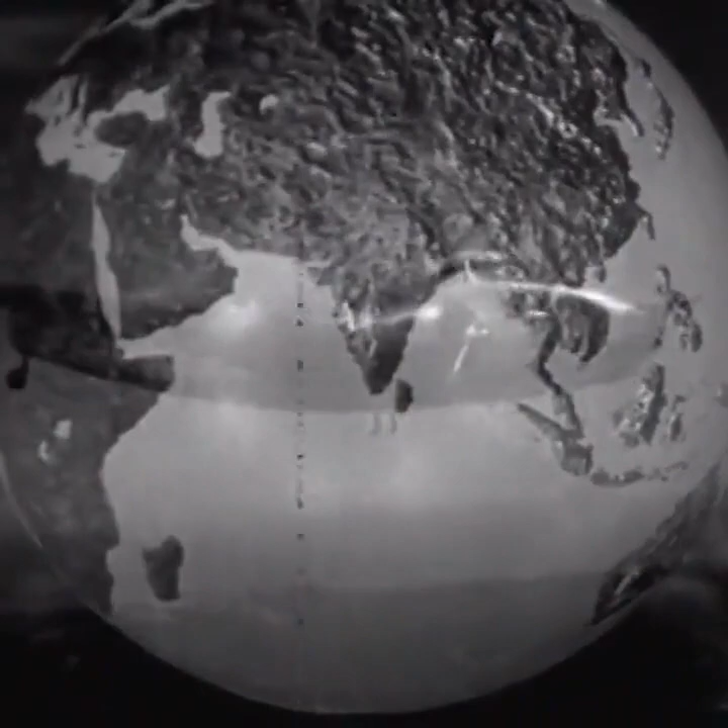And in all corners of the globe, 24 hours of every day, these ships fly the airways in routine flight, confidently accomplishing the jobs for which they were built. The conquerors of time and space.

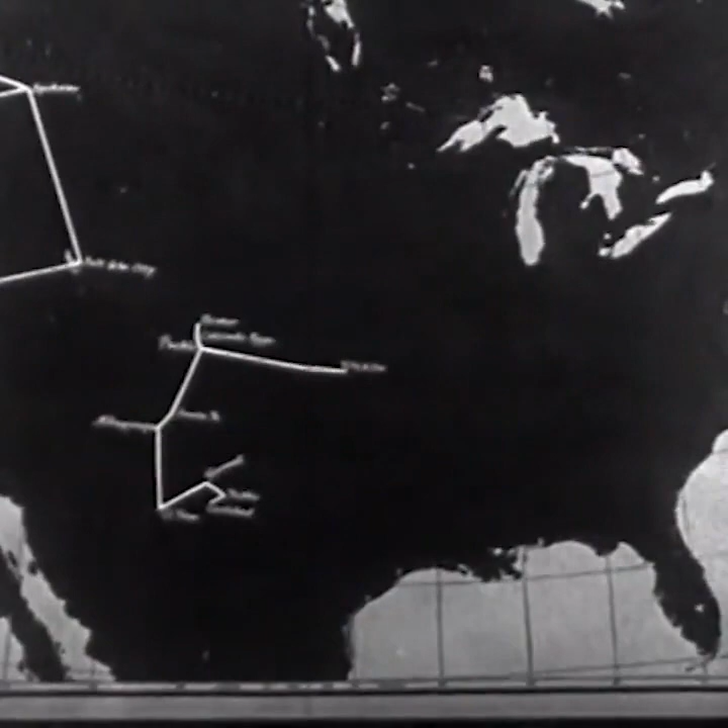Lockheed over North America. United Airlines, Continental Airlines Incorporated, Mid-Continent Airlines Incorporated, Northwest Airlines, Chicago and Southern Airlines, Braniff Airways Incorporated, National Airlines, Delta Airlines, Boston Maine Airways Incorporated, Trans-Canada Airlines, Pacific Alaska Airways.

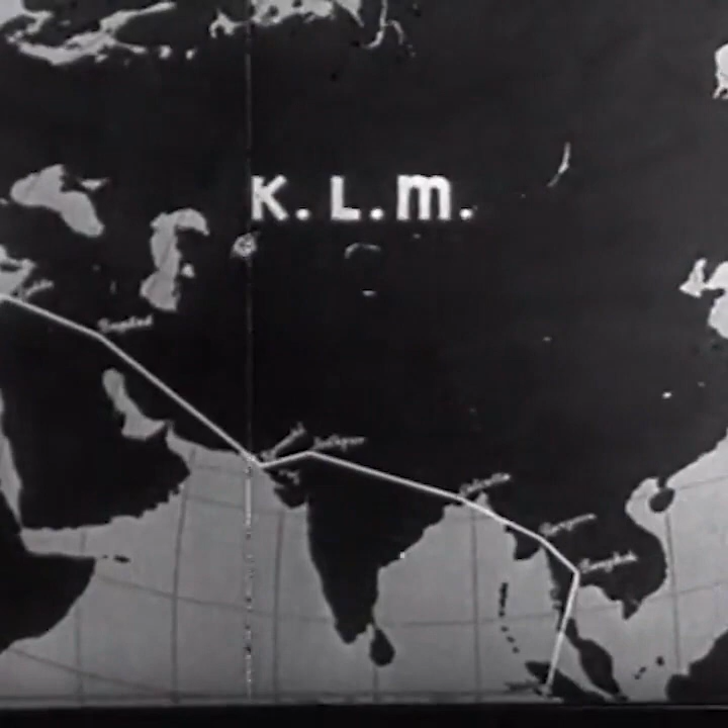KLM, LOT, Aeroput, LARES Romania, Air France. Lockheed over Asia: KLM, KNILM, Japan Air Transport Company Limited. Lockheed over the Antipodes: KNILM, MacRobertson Miller Aviation Company, Guinea Airways, Ansett Airways Limited, WR Carpenter Airlines, Union Airways of New Zealand.

Lockheeds also serve high government officials of the Netherlands East Indies, Mexico, Venezuela, Brazil, Argentina, Australia, Canada, Great Britain, India, and the United States.

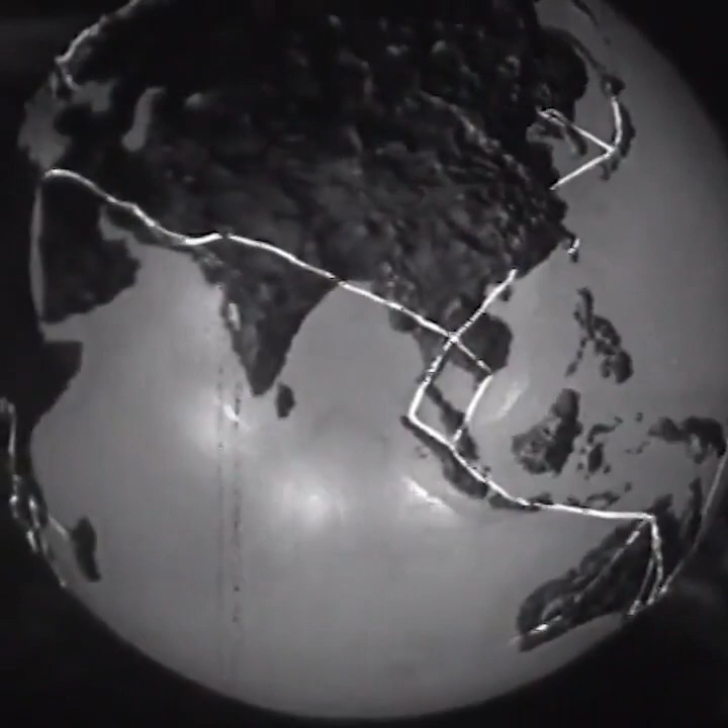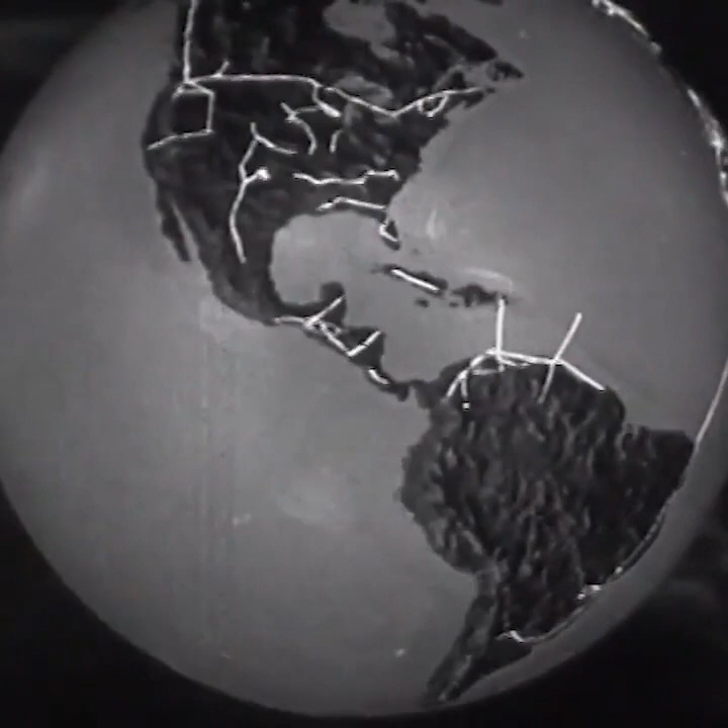Worldwide coverage, but it has not been accomplished in a day. It is the result of a smooth-running combination of men and machines. In that combination lies the story of Lockheed itself. It is a success story, modern, exciting, typically American.

The Lockheed Aircraft Corporation plant, Burbank, California, in 1926. And today, the same company, the same location, but quite definitely not the same plant.

As recently as 1932, sales aggregated the overwhelming total of $23,298.03. In 1940, actual deliveries amounted to more than $42 million, and conservative estimates indicate that in 1941, this figure will be more than doubled.

And to the men of Lockheed belongs a large share of the credit, to their skill and to their loyalty. They are a cross-section of typical American workmen: drillers, riveters, tool makers, die casters, machinists, and technicians. In 1931, there were only 300 of them.

In 1941, over 35,000. Every man who checks in, from office boy on up, has taken and passed exhaustive tests covering intelligence, temperament, and special aptitude to prove his individual ability. 35,000 American workmen, the right men for the right jobs to build the best planes.

This is not a trick shot made with mirrors. It is the drafting room of the engineering department where every new Lockheed has its beginning, conceived with the purpose of supplying the answer to definite needs of the aviation industry. To attain this goal, over 850 engineers make over 5,000 drawing plans, devoting a total of over 200,000 work hours to their mission of creating one new design.

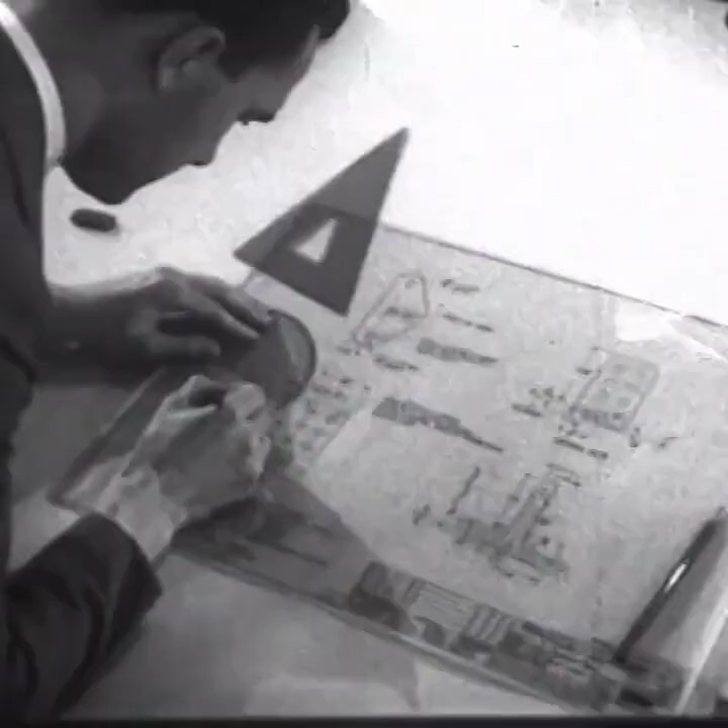The component parts of a modern airplane's wing, fuselage, and tail surface are almost countless in number, yet every single one of them must be engineered. Even the most minute part receives the greatest attention. Four separate drawings are made showing detail from four different angles. Although the part is no larger than a silver dollar, it will have to go a great deal further.

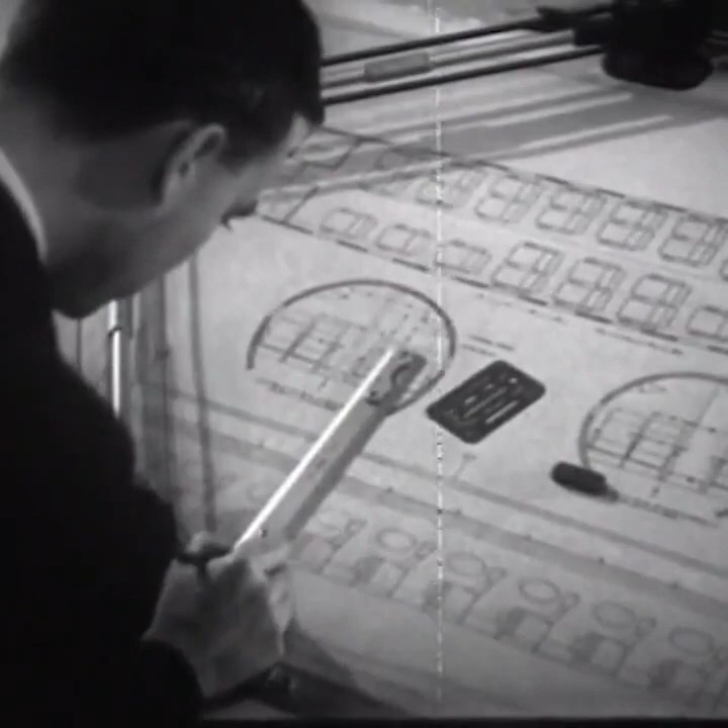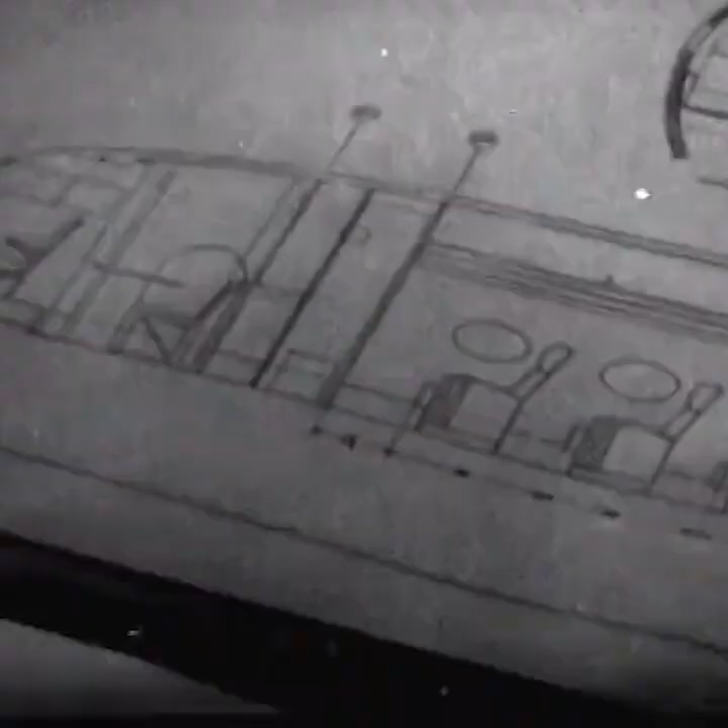The interior of a plane is one feature of design seldom associated in one's mind as coming under the supervision of the engineer. Yet one of his most important jobs is to provide utter comfort for passengers traveling through the air at high speeds. The Lodestar's cabin has been designed for this comfort.

Inside, the sound of powerful motors is reduced to a pleasant hum by scientific soundproofing and vibration control. Restful chairs, ample space, and headroom are results of thoughtful planning, and all Lockheeds are especially adaptable to the requirements of private owners. For businessmen to whom time means money, the Lodestar is convertible into a convenient and dependable office in the sky. The compact 12 becomes a comfortable lounge for attending important events anywhere at any time.

The cabin of Lockheed's new four-motor transport, the Excalibur, will look very much like this. Although the plane is still under construction, the engineers have built an exact replica, known as a mock-up, out of wood. In this way, every possible detail of passenger comfort can be effectively predetermined and applied.

But the ideas and plans that this man and the hundreds like him put into execution are not only those of Lockheed's chief engineers, but those of the entire flying world. For the Market Research Division maintains close contact with the operative branch of the industry. The staff compiles lists of important features relating to a plane's design. These findings are set up in the form of questionnaires.

If you were to build your own ship, on the flight station, where would you locate emergency controls? On the engine control stand, where would you put the levers and the rudder pedals? These comprehensive questionnaires are sent to airline executives, pilots, transport officials in every corner of the world.

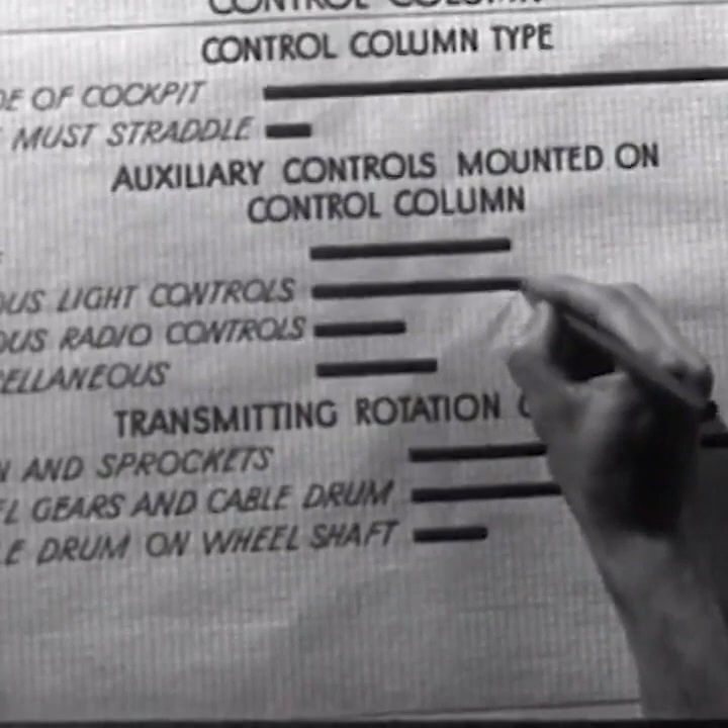Detailed graphs and charts are compiled by competent statisticians. No suggestion is too small. Every answer to every question is checked and noted. These findings are recorded in another pamphlet.

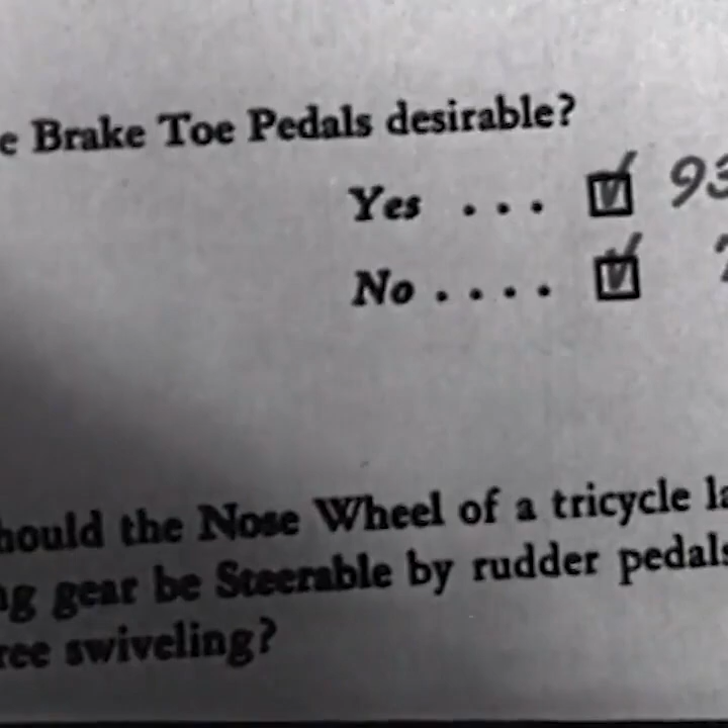You told us this is the way you would do it. On flight station, on engine control stand, and on rudder pedals, we asked, are brake toe pedals desirable? 93% said yes, 7% no. That verdict is submitted by men whose combined opinions represent the experience of over 16 million hours of flying.

These practical viewpoints, as gathered by market research, are submitted to the engineers. They combine these ideas together with their own creative ability in the conception and building of every new Lockheed plane. That's how Lockheed designs airplanes to suit the men who know airplanes best: operators, pilots, and regular airline passengers. And the first form a new plane takes is on paper.

From these drawings and thousands like them, an exact scale model known as a wind tunnel model is made and is connected to instruments which determine its flight characteristics. The model is hand-carved, accurate to the fraction of an inch, weighs over 500 pounds, and costs more than $5,000 to build.

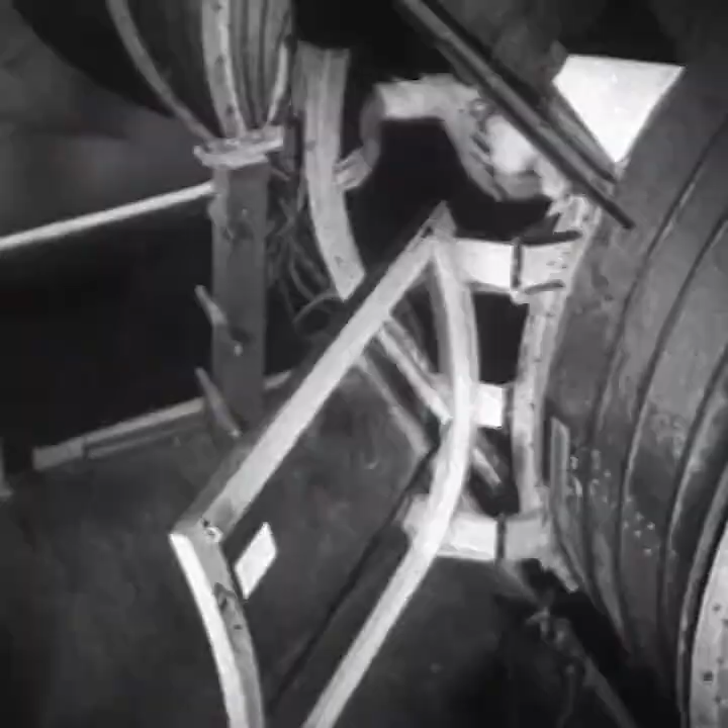The door is closed, the wind tunnel sealed. A flip of the switch and the wind propeller whips up to speed. The model is exposed to a far higher velocity than this 90-mile-an-hour wind.

The small wind tunnel model is actually subjected to and withstands a much greater force. From an idea to an actuality, from theory to fact, from a model to a completed Lockheed, the plane has been built. More than that, into it has been built the strength, ruggedness, and durability necessary for its safety and high-speed performance. But not so long ago, this shining plane was only a small part of a trainload of metal addressed to Lockheed.

For the metal inside these wooden frames is the stuff that planes are made of. Hard and strong, it must be fabricated by men and machines into the parts that make airliners.

Giant shears act as huge mechanical scissors. Metal sheets are slipped into place. The sharp blade strikes and cuts through them as if they were cloth.

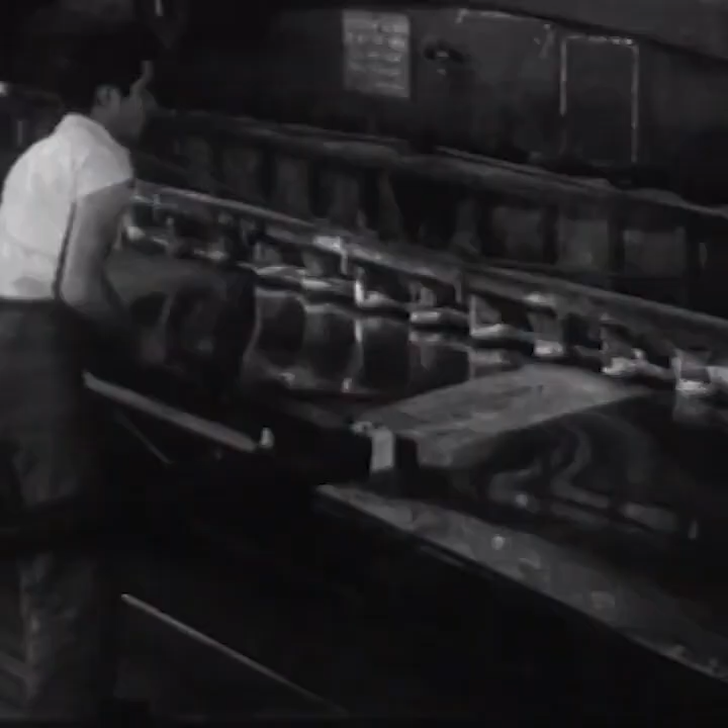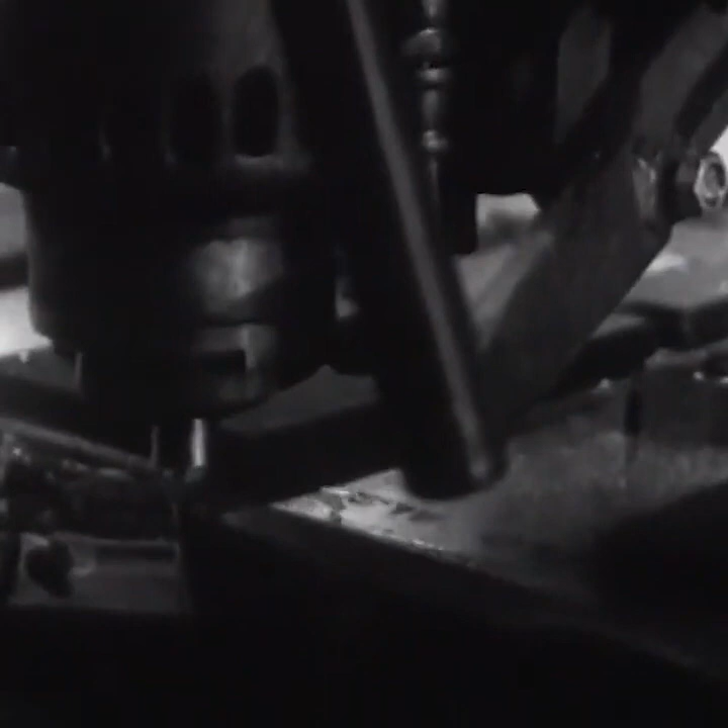The high-frequency router, a dental patient's nightmare, turns 15,000 revolutions a minute and cuts layers of metal into their first rough shape. The bit turns so fast that it must be cooled by a constant stream of oil.

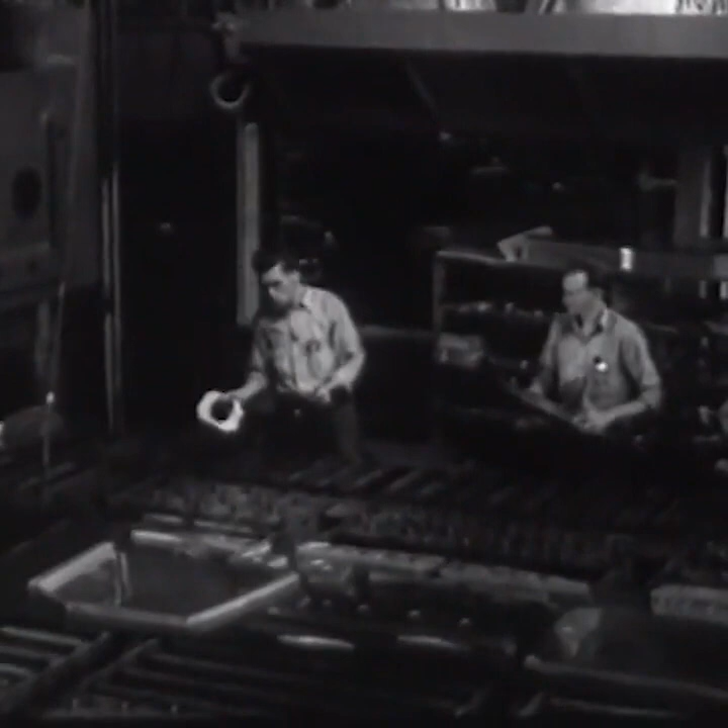The massive hydro press exerts an overall pressure of 9 million pounds, and it literally squeezes parts out of metal. An endless chain of roller conveyors carries a tray with the forms to workmen. They put the metal, which has already been cut to the correct size, in place on the forms.

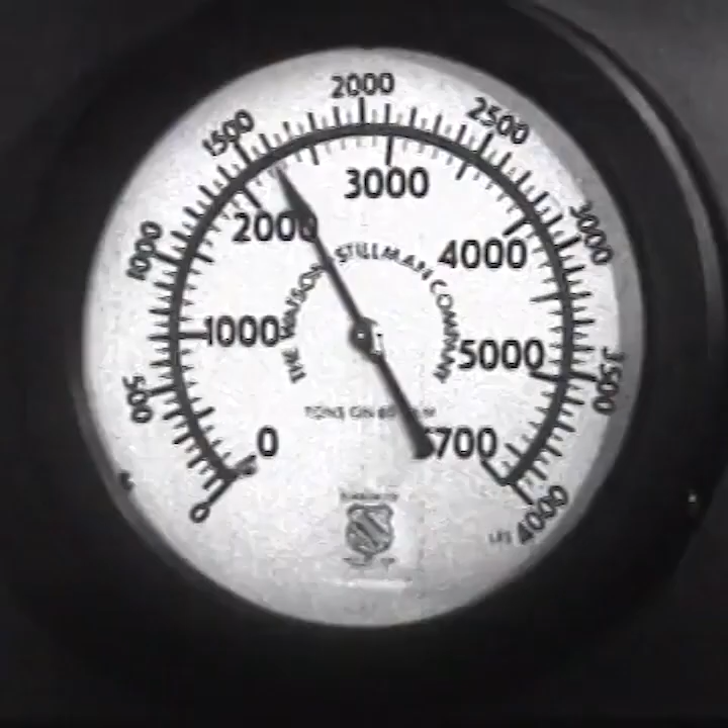The tray now continues on its way into position under the press. The operator touches a switch, the press starts down, and look out below. Almost unbelievable pressure, an irresistible force, but under perfect control.

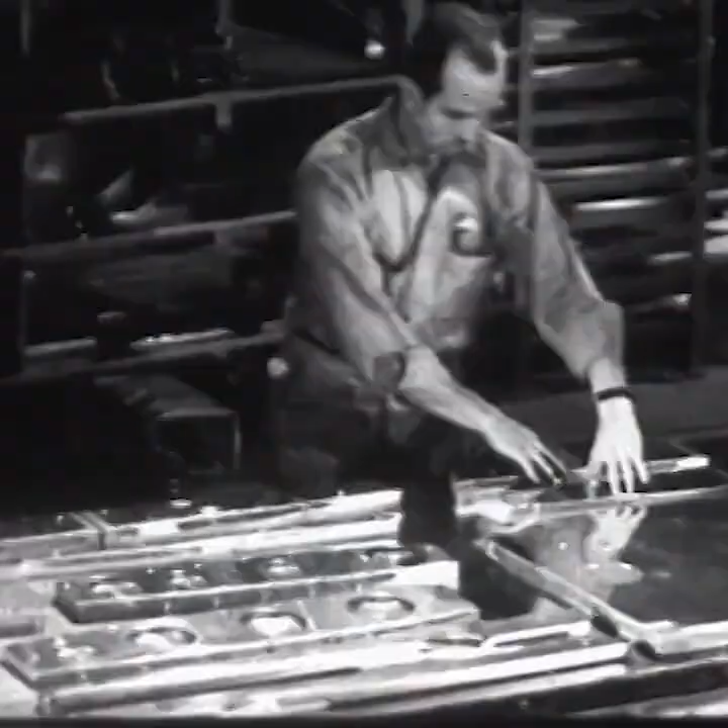And where plain sheet metal went in, finished parts come out. The hydro press turns out more parts in 1 minute than 2 men could complete in a whole day, and turns them out better and more accurately.

A compressed air stamp which forges metal is an excellent example of powerful machinery under absolute control. Taps as gentle as a tack hammer, then the crushing impact. What a nutcracker this outfit would make.

And yet its control is so delicate that it can crack an egg, at least so the operator claims. Look out there, a little too hard and you'll have an awful mess. Be careful.

Well, hello, stranger. You certainly have a brand new kind of a mama.

Skilled men and precision machines have fabricated these parts. But even metal can be strengthened and protected. To do this, there are several types of processing.

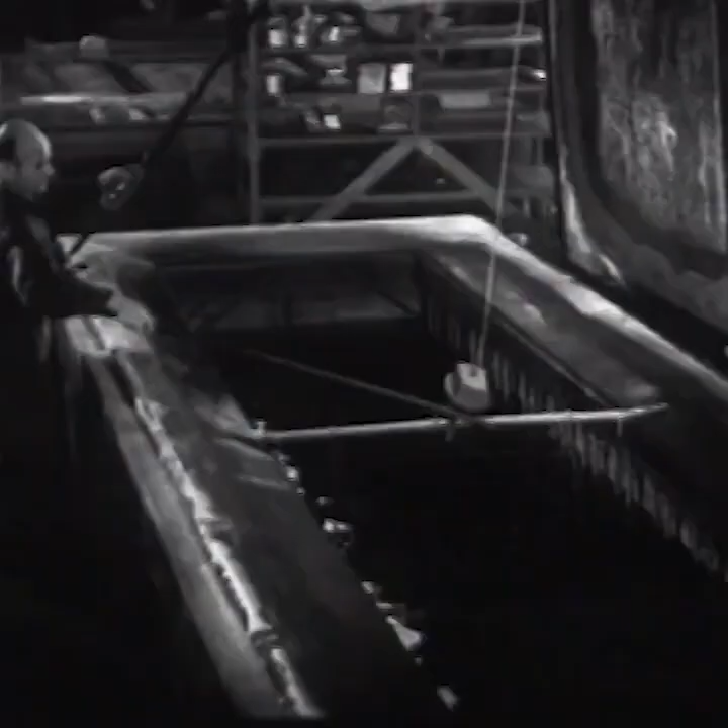Complete electrochemical anodizing baths provide parts with a protective coating of oxide film. This is a safeguard against the threat of corrosion caused by moisture. It is an interesting fact that these parts are protected against any harmful effects of moisture by being given a bath. Another type of bath is used for a different purpose.

In order to harden and thereby strengthen certain parts, they are immersed in a hot salt solution of sodium potassium nitrate. In large ovens, other parts are hardened by baking at 1550 degrees Fahrenheit and quenching them in oil.

It is easy enough to say that these parts, which will eventually be the plane, are strong. To prove that they are, to constantly guard the Lockheed measure of strength is the duty of the testing laboratory.

A spectrograph is one of the most modern scientific testing devices. It analyzes the purity of the metal alloys which go into a plane.

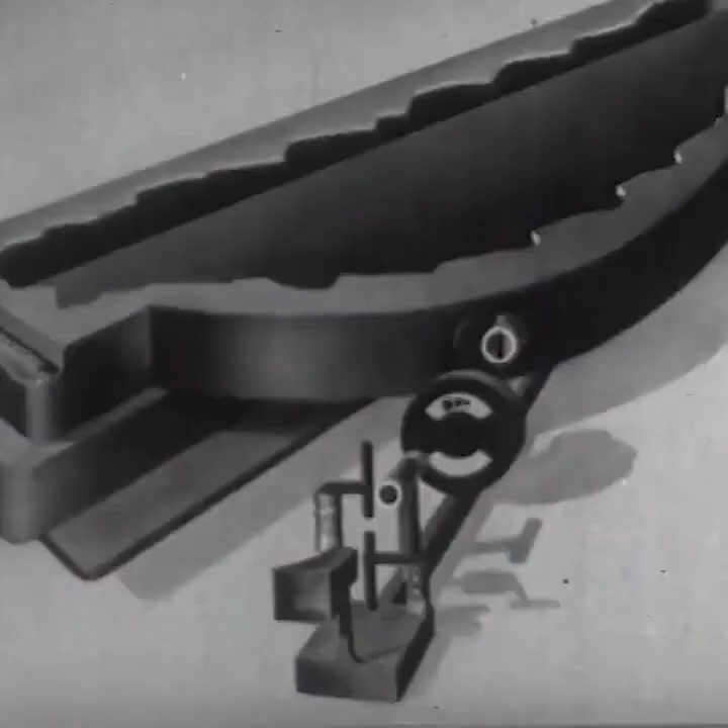Tremendous heat created by an arc burns sample filings of the metal. These filings are placed in a cavity on the lower of 2 acid-treated graphite electrodes and then burned. The light of the burning metal passes through a lens and then through a rotating sector, the adjustable opening of which controls the amount of light falling on the slit.

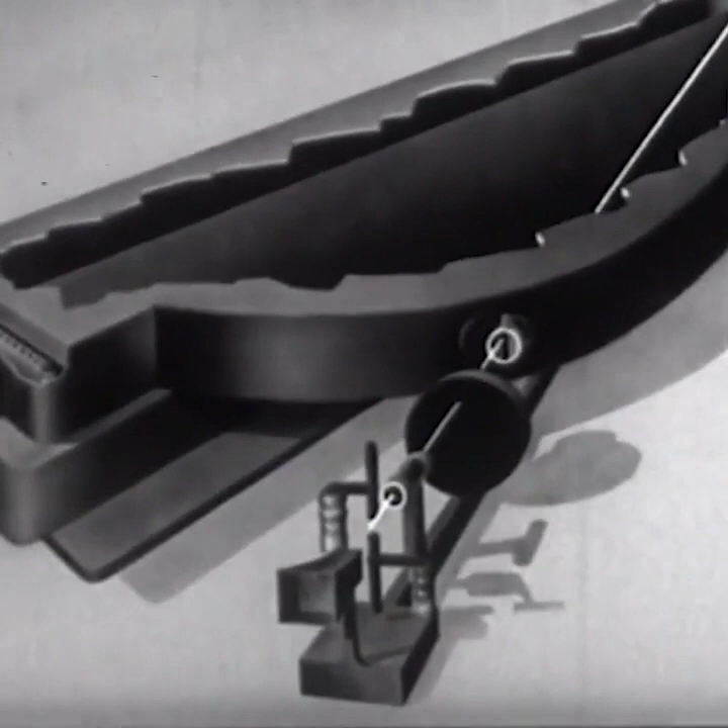The light now passes through the slit and falls upon a diffraction grating. This diffraction grating is a concave aluminized glass plate on which 24,000 lines per inch have been ruled with a diamond point. The light is separated by the grating into wavelengths.

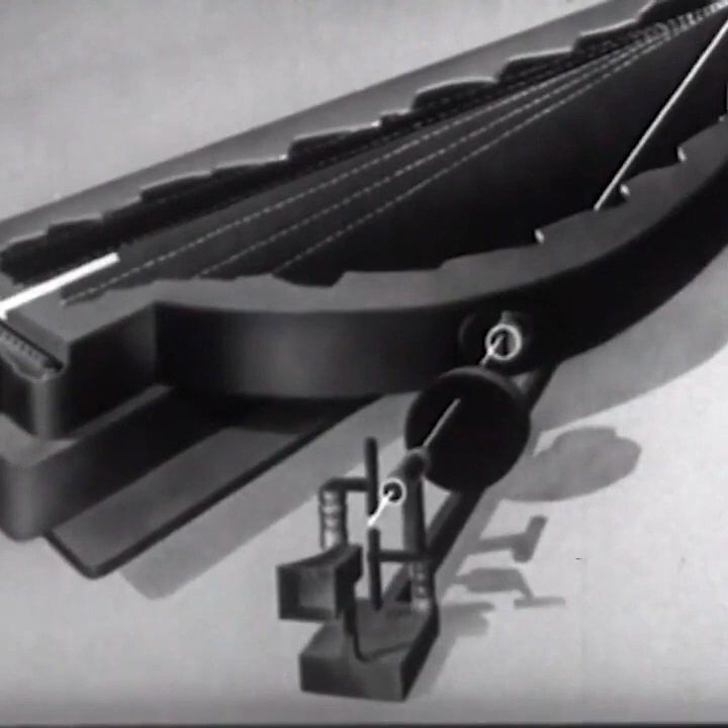These wavelengths, or light rays, fall upon a strip of film, and a photographic record of them is thus produced. Since each element has its own wavelength, from the developed film it is possible to determine exactly which are present in the alloy. In this manner, the spectrograph immediately detects all impurities, and any inferior metal is promptly discarded.

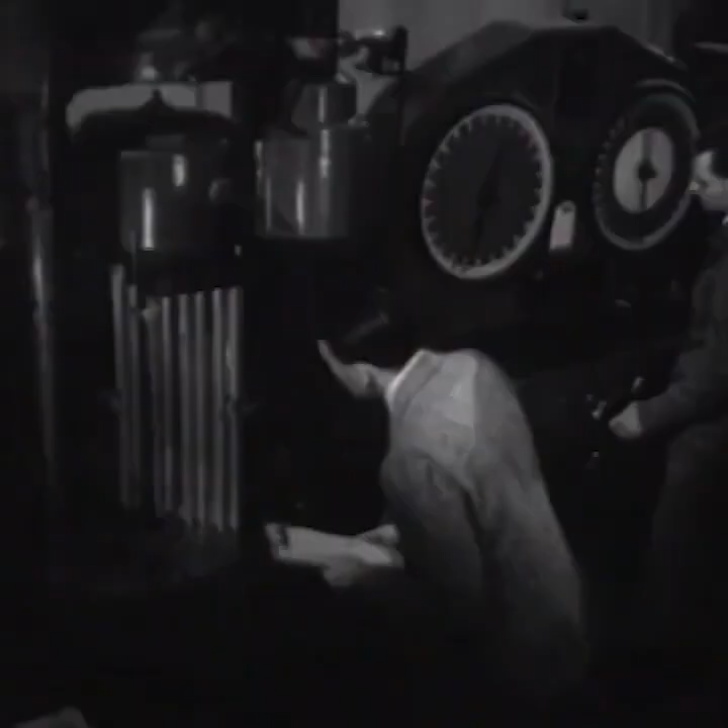The sole purpose of this huge machine is to break things. Its powerful jaws, capable of a compression of 300,000 pounds, are about to crush a small section of the wing in order to measure its resistance.

Now watch carefully. The upper jaw is clamping down with an invisible, relentless force on the seemingly frail strip of metal. But actually, just how frail is it?

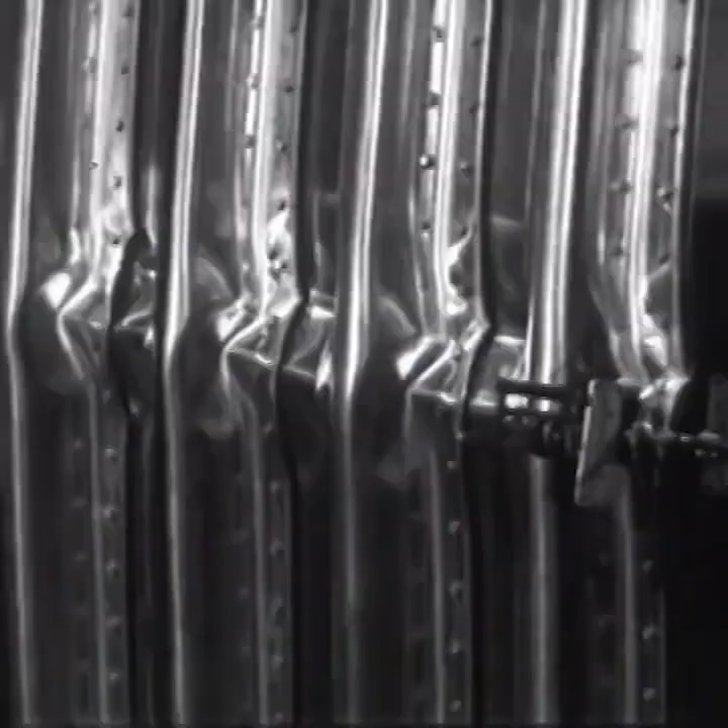60,000 pounds? 70,000? There it is, a slight ripple. The breaking point has been reached, and it takes a pressure of over 80,000 pounds to even bend this frail little section of a wing.

For contrast, let's see what happens to a solid cylinder of concrete, which certainly appears much stronger. There is the first crack, and the concrete shatters completely under a pressure of less than 75,000 pounds.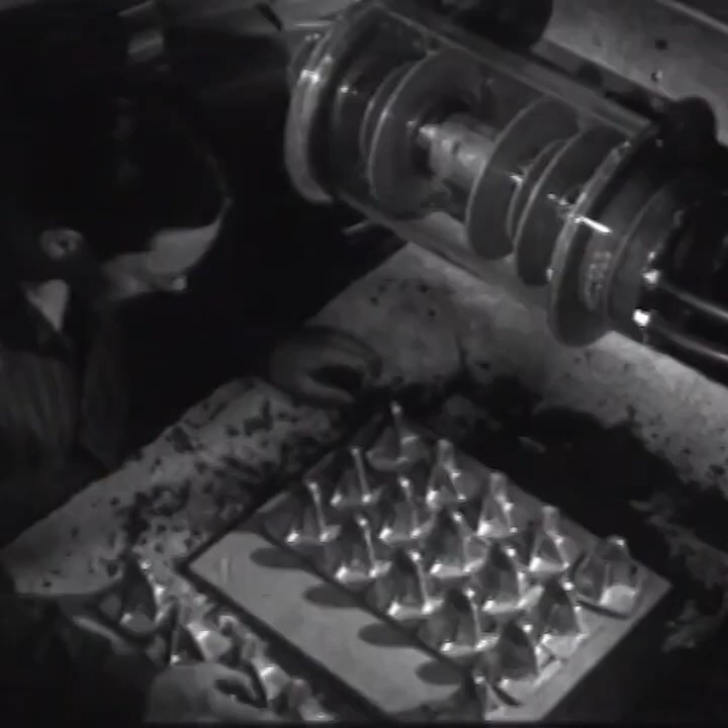All stressed parts, such as forgings and castings, are X-rayed for any possible flaws in the metal. Lockheed X-rays more parts than all other aircraft manufacturers combined. They may look new and shiny on the surface, but that doesn't matter. What are they like underneath?

This batch is fine, perfect. A different story here. Those slight, almost imperceptible flaws which doom it to the scrap heap would be invisible to any eye other than the X-ray. Therefore, although it is important to know what is on the outside of a plane, every stressed part is X-rayed because Lockheed thinks it is even more important to be absolutely positive of what is on the inside.

Yes, every part of this plane is built for the strength, ruggedness, and durability to achieve the highest speeds. And there goes the Lodestar. Carrying a full load of 17,500 pounds, it speeds down the runway for the takeoff. In 15 seconds, after a run of only 860 feet, it leaves the ground and soars into the air, climbing at a rate of 1,200 feet per minute.

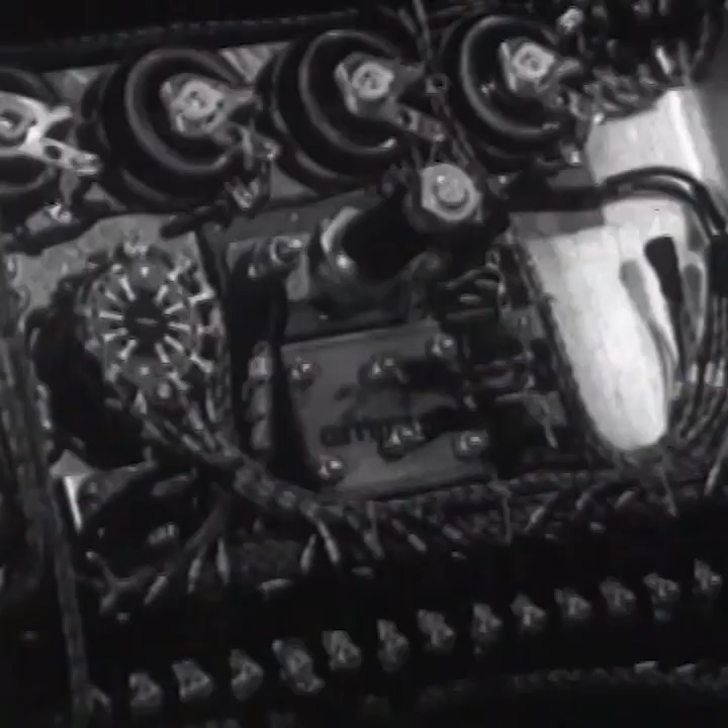While the plane is in flight, the dials and indicators on the panel are the guides by which a pilot flies. Over a half a mile of wire connects them with the controlling instruments, which must be infinitely accurate before they are installed. In the instrument testing laboratory, each instrument and accessory is, to all intents and purposes, actually flown before being installed on the plane itself.

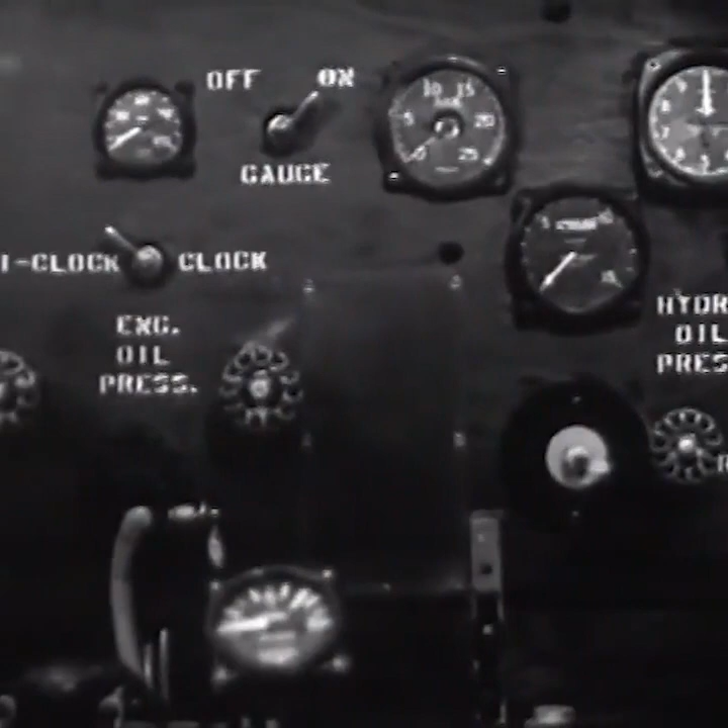For instance, on this stand, a motor duplicates the swing of a plane to test the turn and bank indicators. Here, tachometers are also tested, along with propeller governors, vacuum pumps, fuel pumps, starters, generators, and hydromatic motors for feathering propellers. The automatic pilot is checked by a vacuum system against mercury manometers.

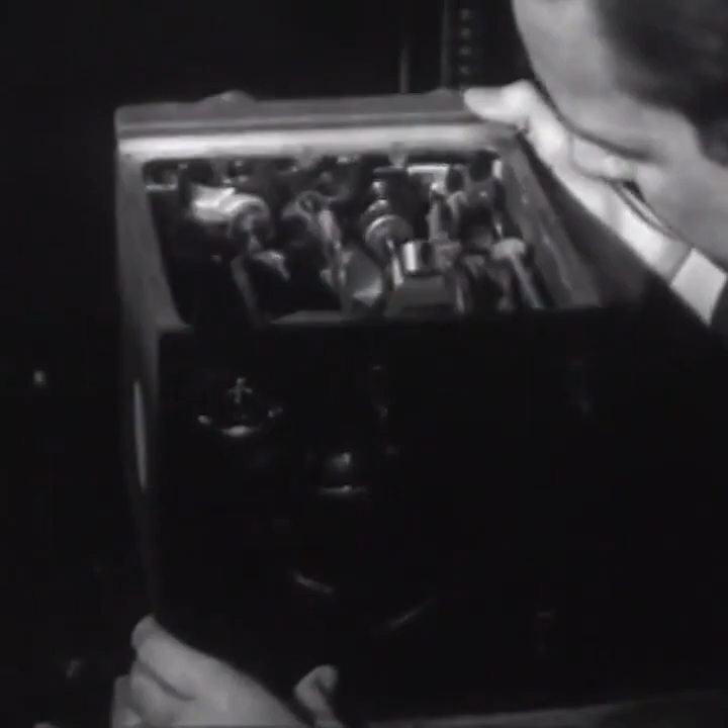This small box can guide a plane in flight, keep it as true to its course as the most experienced pilot.

An airplane is a chain of which the thousands of separate parts are the links. They must be forged together in order to shape the wing, the tail, and the fuselage. The duty of the wing is to provide the lift that sustains the flight of an airplane. Here in the plant, it must be assembled as flawlessly as it was designed.

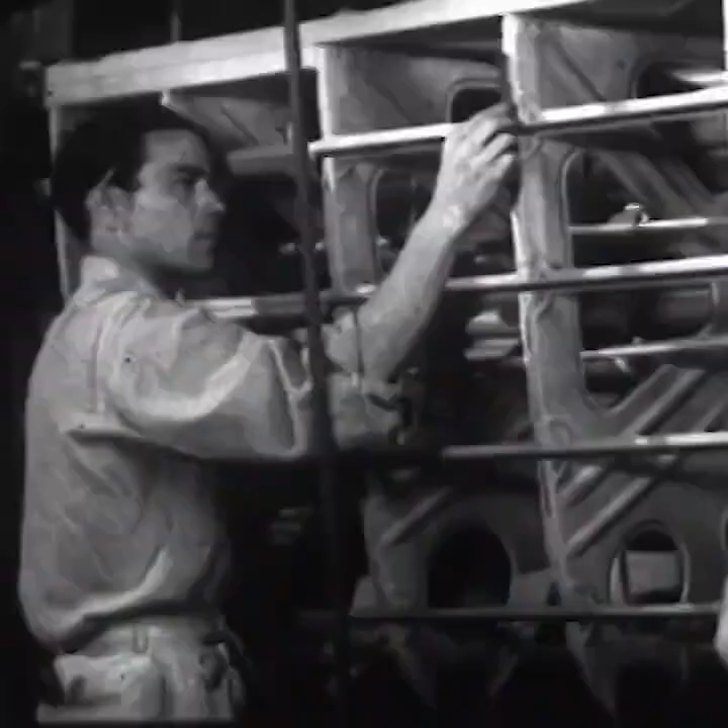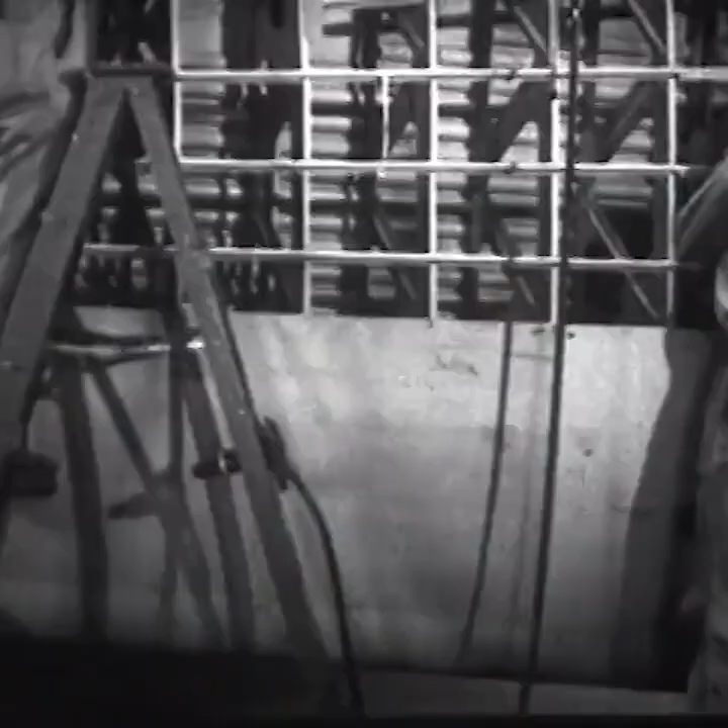Although a wing is generally considered as a unit, it is really composed of 3 parts: 2 outer sections and the center section. We are all familiar with the general shape of a wing, but while an outer section is in the first stages of assembly, we can get a good idea of the complex structure on the inside. Every rib and crosspiece has its purpose. Remember, it was just a small part of the wing that we saw withstand a compression of 80,000 pounds.

Each operation is executed with precision and care as the outer section moves down the production line and takes shape. High-speed electric drills punch holes for the rivets. There are more than 700 drillers or riveters who have all had previous training. Even so, before they're assigned to actual production, they must attend Lockheed's own school until they can uphold the plant's standard of efficiency and skill.

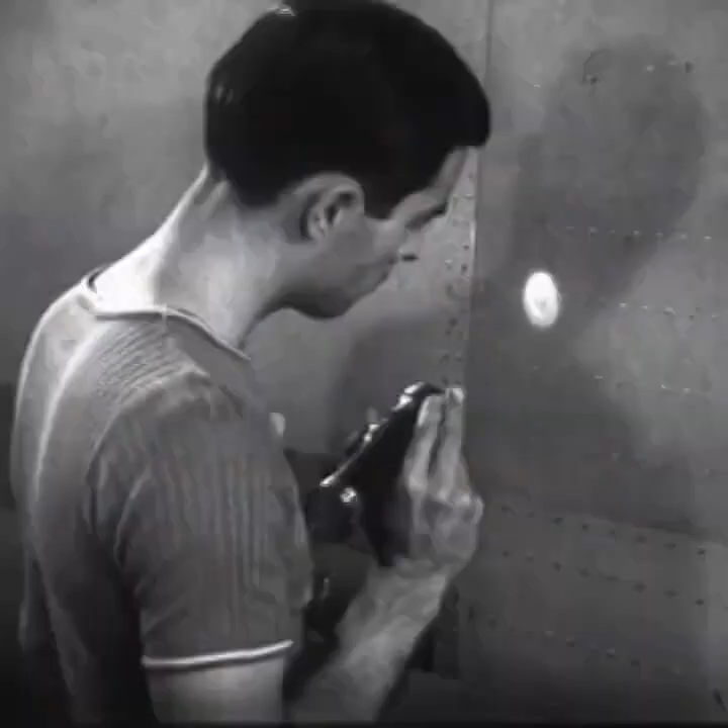There are more than 50,000 rivets on a completed wing, and every one of them is checked, examined, and checked again. This requires an army of over 200 inspectors, such as this one. By the time a Lockheed plane is assembled, every square inch of it has been inspected at least 5 times. Inspector number 158 finds this row perfect and okays it.

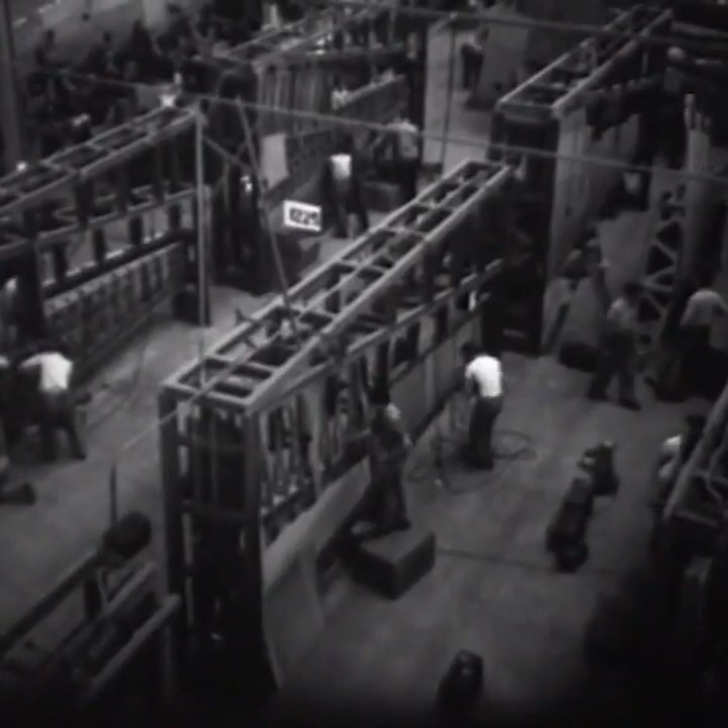And the story of one outer wing section is the story of 10, of 20, of 1,000 sections as they move down the line in an endless parade. Mass production with the emphasis on precision and quality.

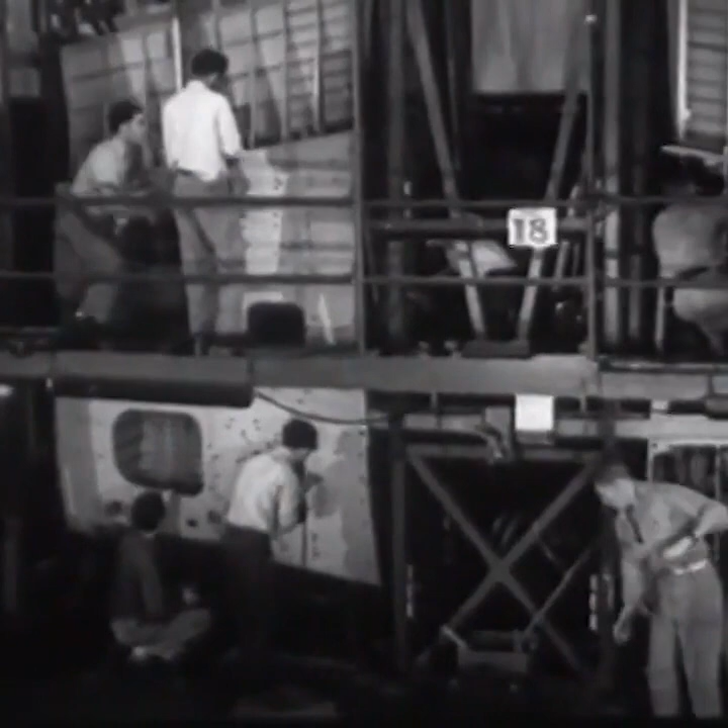The assembly line for the center section of the wing is one of the largest and most vital units in the plant. It has to be, because the center section is the strong man of the plane. It must be constructed and assembled so as to be able to support heavy loads and to withstand great strain, for it unites the 2 outer wings with the fuselage.

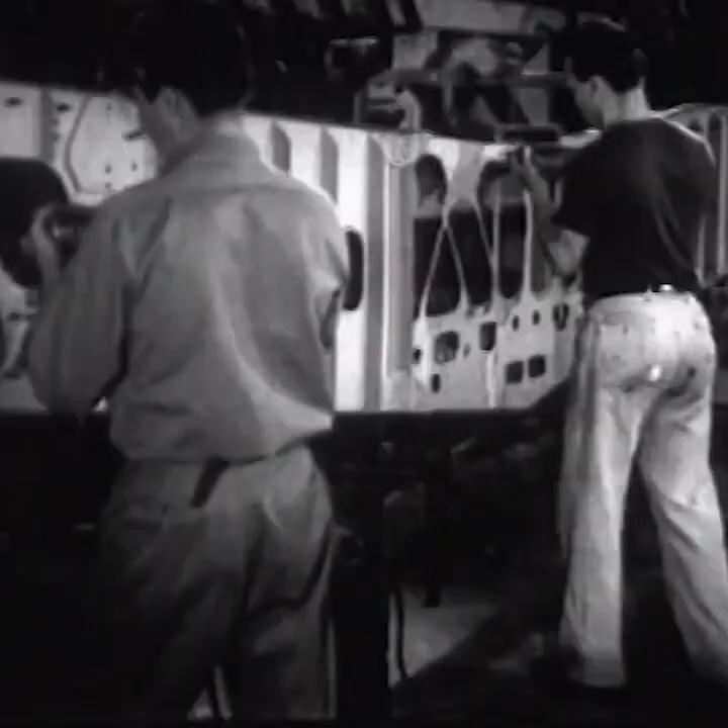The fuselage will eventually rest in the gap between the 2 shoulders, and the wings will be joined like arms on either side. The main beam of the center section is the strongest part, the backbone of the entire plane. Like a bridge, it must carry any burden with steadfast dependability. And the main beam is built just like a bridge.

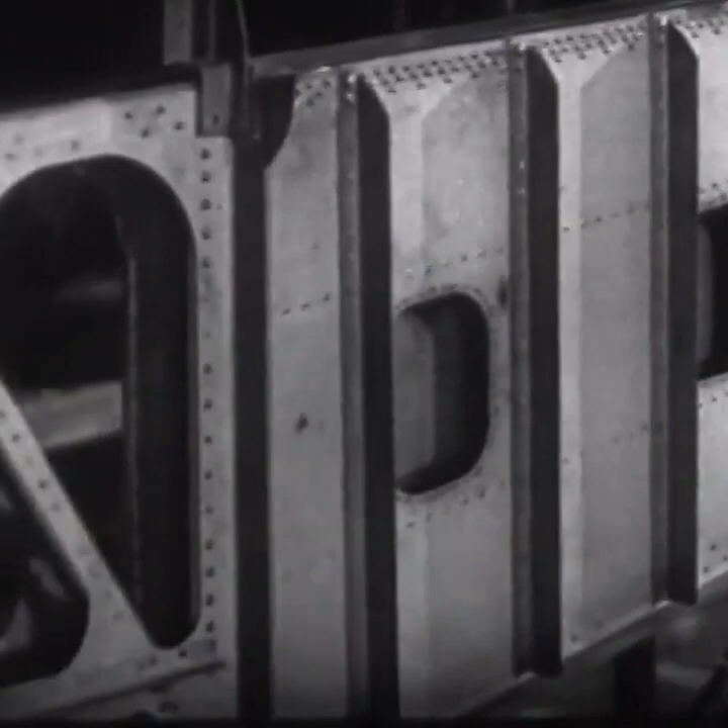At all times, it carries all of the flying load, the engine load, and the landing load. It is stressed to support more than 5 times the total weight of the fully loaded plane. Completed and assembled, capable of supporting a static load of 70,000 pounds, the wing will do its job as the men who built it have done theirs.

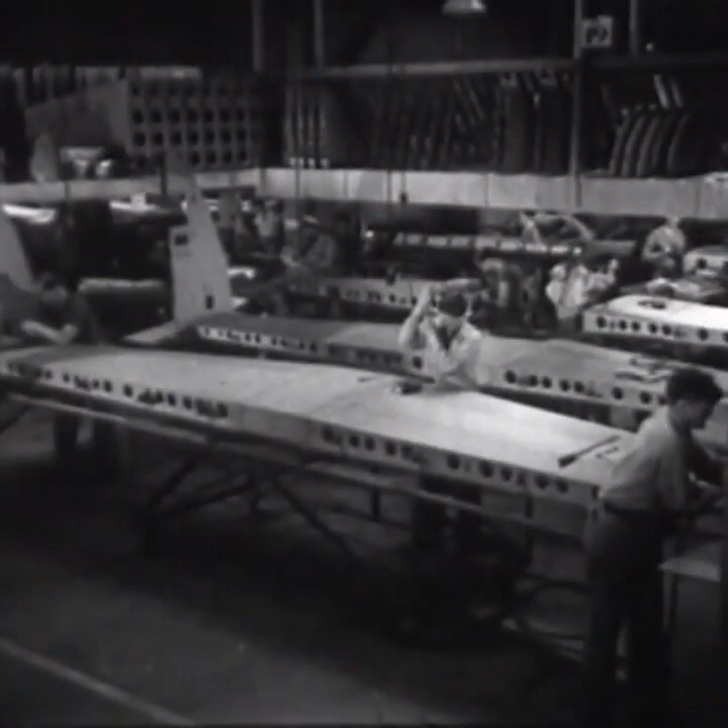The tail surfaces control the maneuverability of a plane. The use of twin rudders was developed by Lockheed and are one of the distinguishing features which point out every Lockheed. The fuselage is the body of the plane.

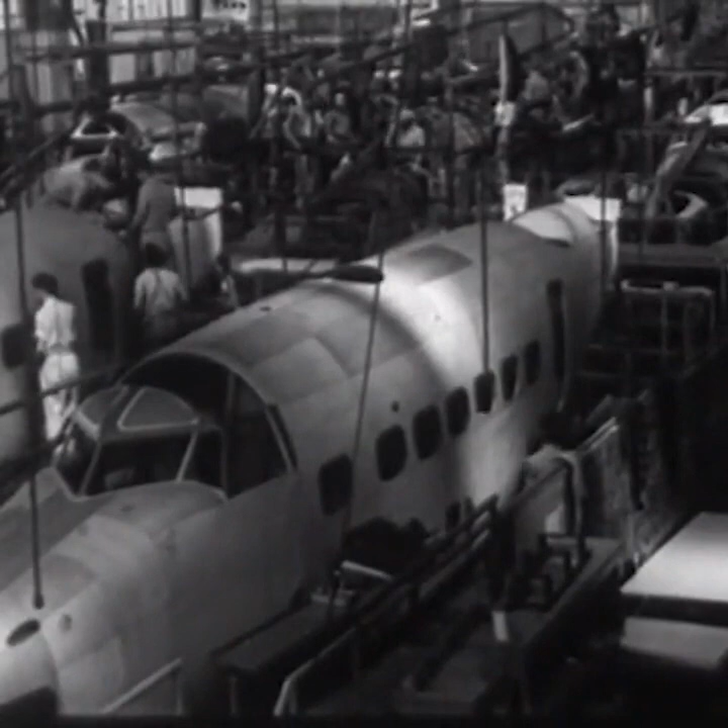It represents the final word in aerodynamic design and streamlining. And during construction, these basic principles are built into the fuselage and applied to every operation from the beginning to the completed shell.

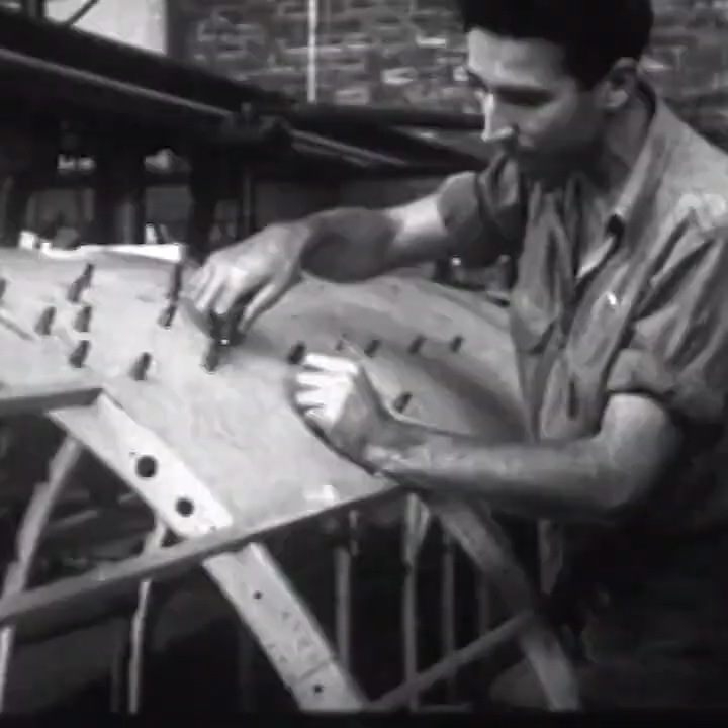As the first step in its assembly, the bulkheads are joined together by stringers, which form the basic shape and strength of the fuselage. Skin fitters then fit and shape the metal sheets, attaching them with removable fasteners. On their heels come the riveters, while every stage of the assembly is constantly under the close check of inspectors.

Assembling with electric continuous spot welders facilitates production and gives many fuselage parts an extra smoothness for better streamlining. With an eye to the future, Lockheed is constantly enlarging on this process because better streamlining means greater speed.

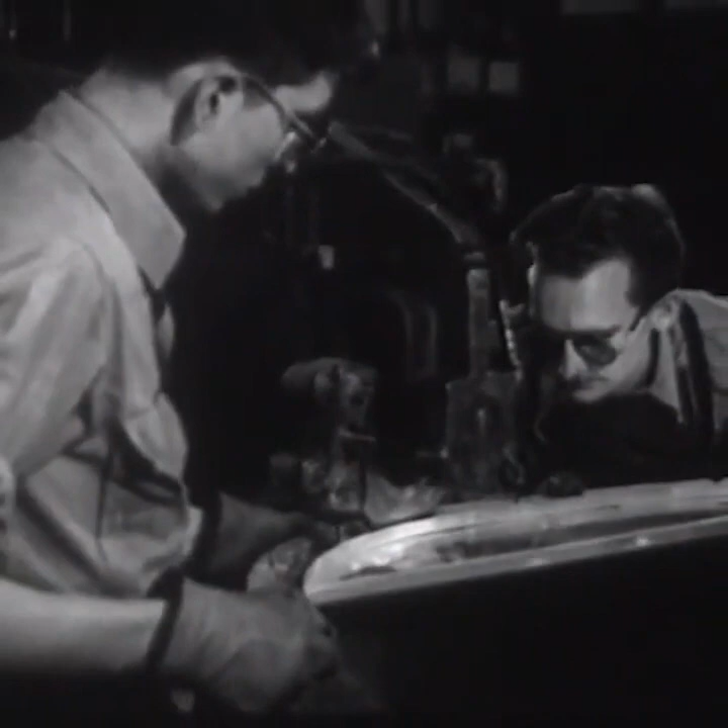And so another fuselage is finished and ready for mating with the wing. Like a ship being launched, it moves slowly down the ways. Slowly now, yes, but for just a little while longer.

Soon sunlight will be glinting from its metal sides. Its nose will point upwind. In the comfort of its cabin, passengers will read or write or sleep or think after their own fashion, and beneath it, the lakes, rivers, and valleys of the countryside will unfold.

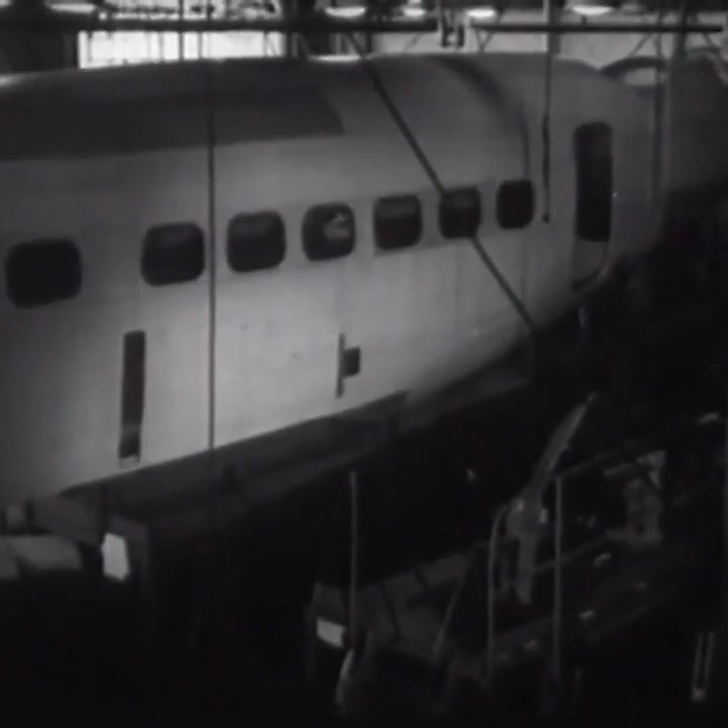Slowly still, the fuselage is lowered into place, united with the wing. And now, slow no longer.

Speed on the water. Speed on the snow. Speed on wheels. On rails. Speed on wings. There is truth in the slogan that it takes a Lockheed to beat a Lockheed.

And as the plane approaches the field, it slows down for the landing. The Fowler flap has been adopted and developed by Lockheed. The flap gives a greater lift to the wing and provides a brake action to reduce the speed.

The plane lands at 65 miles an hour, and from a height of 50 feet, it can come to a complete stop in less than 600 yards. This Lockheed Lodestar, with its safety, its comfort, and its great speed, typifies the ideals of aviation in America.

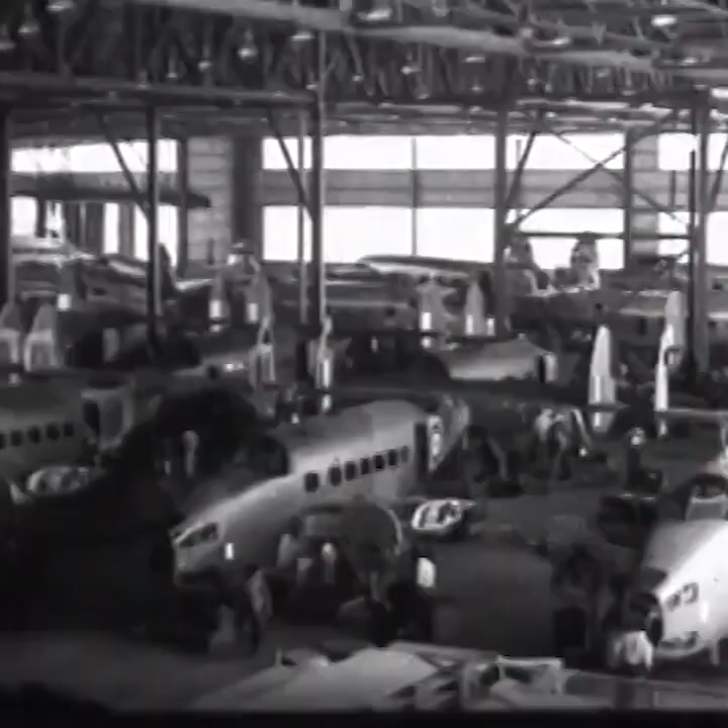To protect these ideals, Lockheed is contributing its share toward national defense and the defense of democracy in other parts of the world. These B-14 bombers, better known as the Lockheed Hudson bombers, are rolling off the production line at an ever-increasing rate. They have been ordered in great quantities by Great Britain and Australia.

When ready for delivery by boat, the Hudson bombers are dismantled. The sleek fuselages are carefully encased in canvas, and the wings, already stowed away below deck, are crated in wooden frames for safe shipment. When the planes reach their destination, they are easily reassembled and soon ready to take their places in the staunch defense of the British Empire.

And while these planes start on their long journey by water, others are being given their final test flights for the tough job ahead. And still more are winging their way directly toward Canada. In combat, in actual line of duty, the Hudson bombers have won a name for their efficiency and dependability.

And as America builds its planes for commerce and for defense, it is well to remember that Americans invented the airplane and developed the modern conception of mass production used by Lockheed.

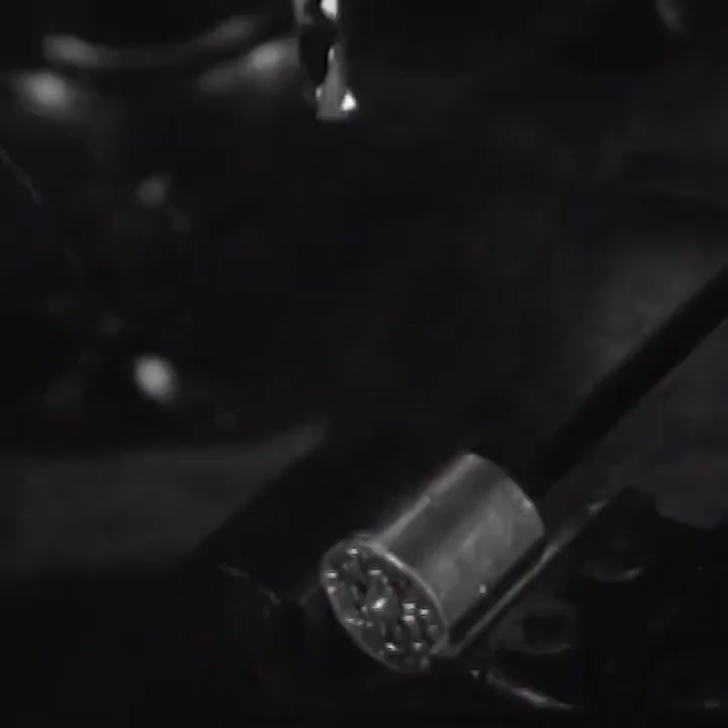And out of the vast production line come Lockheed's, the 212, the Electra, the 12, the Hudson bomber, the Lodestar, and now Lockheed's answer to the challenge of our times, the Interceptor Pursuit P-38.

It has been developed solely for national defense, and Army officials consider it the fastest military plane in the world today. The P-38, a man-made comet.

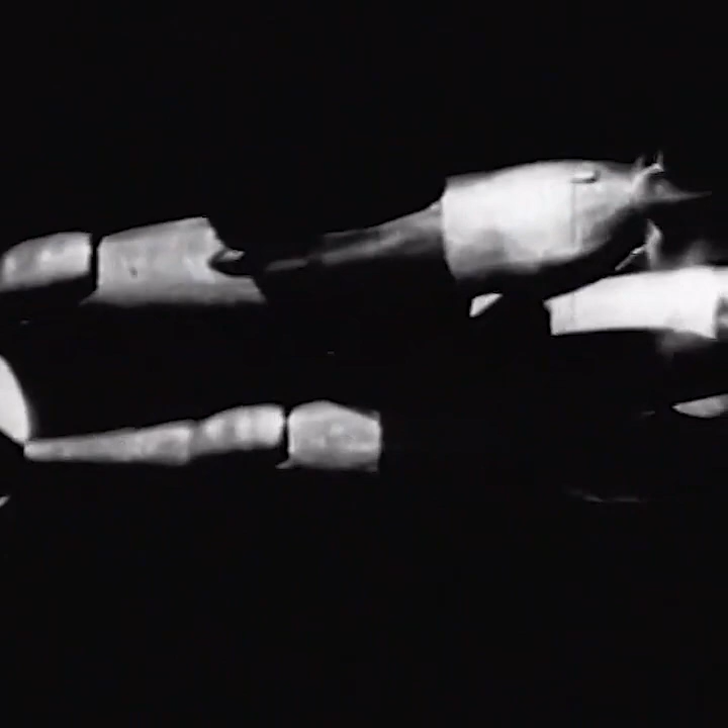The P-38 is a completely new development in conception and design. The purpose of this deadly single-seater fighter is to prevent any would-be attacker from reaching his objective. Lockheed is building vast quantities for the United States Army, and many of its features are closely guarded military secrets.

But it can be revealed that the P-38 will climb a mile in a minute, and its motors are so quiet that it can approach any target almost without warning.

And as wings soar higher above America, so are soaring the hopes of free men the world over. For they know that whether it be for commerce or defense, ship for ship, American planes have no equal.

And just as Lockheed commercial transports serve the people, so do the Lockheed military planes stand ready to serve should the need arise. The striking power of Hudson bombers, the speed of the P-38,

Envisioned by Lockheed, engineered by Lockheed, built by Lockheed. Wings of eagles for the protection of our country. Wings of progress for the prosperity of our people, today and tomorrow.

And the airplane of that tomorrow, who knows what it will be, for the march of aviation has been so swift. But whatever it is, the world will look to Lockheed leadership then as it looks to Lockheed for leadership today.